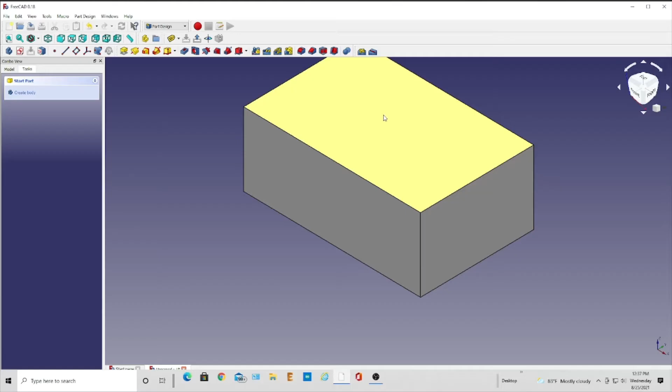While I have this here, I want to get my thickness. So I'm going to click on the very top of this, and I'm going to go thickness, and enter it in. I want those walls to be 3 millimeters thick. And the mode skin is fine.

Where it says arc, you want to put this at intersection. Click this, make thickness inward. We're going to click OK. And there we have our box.

But we're going to want to put something, we're going to make a pocket in here, and we're going to put a corner. We can't just put these holes in here, it'd be too close. So what we need is some fillets in here, or chamfers.

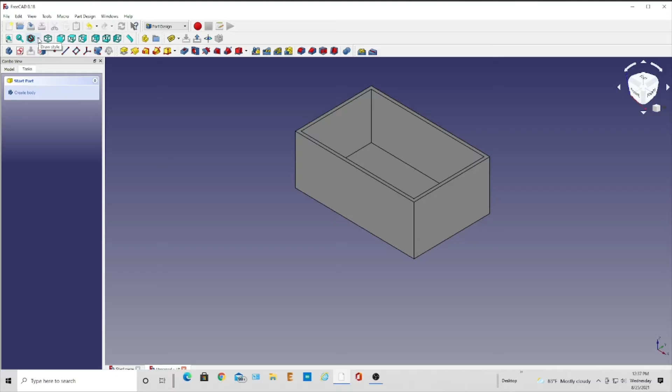So let's do this. Let's go to the draw style and make this a wireframe. From there, I can see these inside corners.

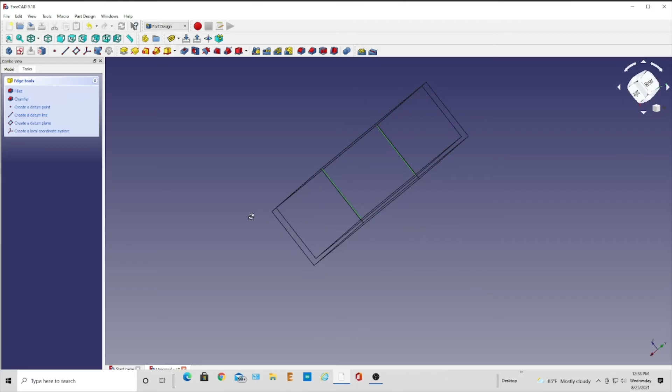I'm going to hit my control button, click that corner, and now to rotate this, I want you to push your middle scroll button and your right mouse button at the same time, and you'll be able to scroll that. So again, that's your center mouse button, the scroll wheel, and the right mouse button.

Hit control again, click on that, hold control, click on that. Then I could come and hit my isometric view.

And I'm going to go to my chamfer, and I want to make that 6 millimeters. That's going to give me plenty of meat in there. We're going to hit OK.

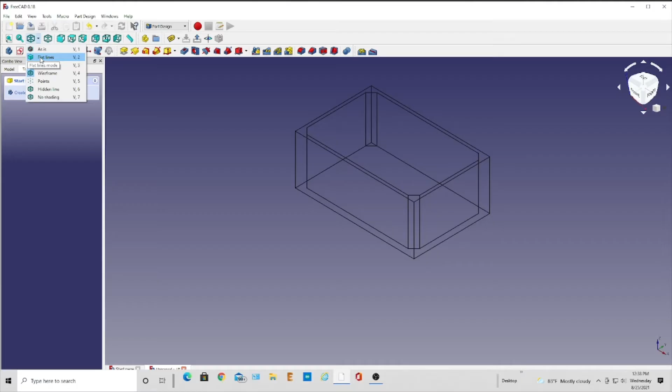And now I want to turn that back on so I can see that. Let's go to flat lines. There's our flat lines. So we're good.

So now I want to work on this surface here to put these holes in it. So I'm going to click on that, and I'm going to go create sketch again.

And now this part's really important. You want to make sure you do this. You want to come over. This is that explode button. It is creating an edge to link for the external geometry. So click that and make sure you hit the outside lines of this right here.

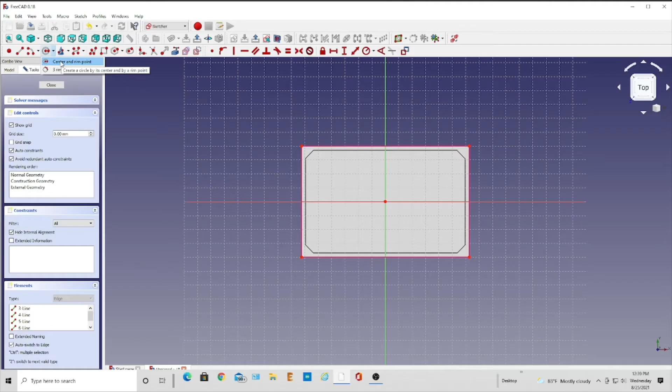Right click on that. Now I'm going to hit my circle button, and I want center and rim point. And let's zoom that in. I just did that by hitting the scroll wheel to zoom that out.

And just get these anywhere located in there. And in here, right click. So we need to get our constraints.

So we're going to make this circle here and this circle here equal. So come up to this equal, and it creates an equality constraint. Now I want this one and this one. I'll constrain that, this one, and this one.

So what that does, when I want to set my size, I can just come up here to constrain the diameter or constrain the radius, hit one of them, and I'm going to say I want this at, say 3 millimeters. We're going to change that later when we do the threaded hole, but we'll just put 3 millimeters in there.

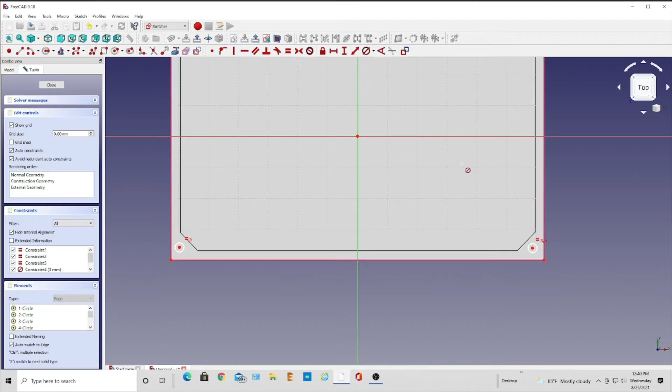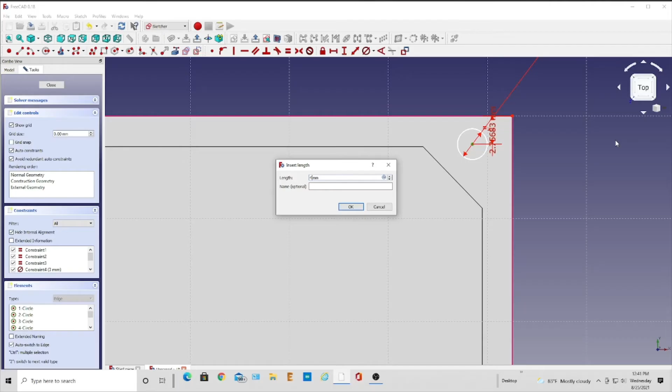So now what I need, and we'll right click off that. I want to zoom in here, and I'm going to give it a horizontal and vertical constraint. So let's do the vertical. Hit that center point and that center point. And let's put this at 4 millimeters down, and we'll have it at 4 millimeters in as well.

And just pan up, and in order to pan, push that scroll wheel on your mouse. Hit that and that, 4 millimeters. Pan over, that and that, 4 millimeters again. And again, 4 millimeters.

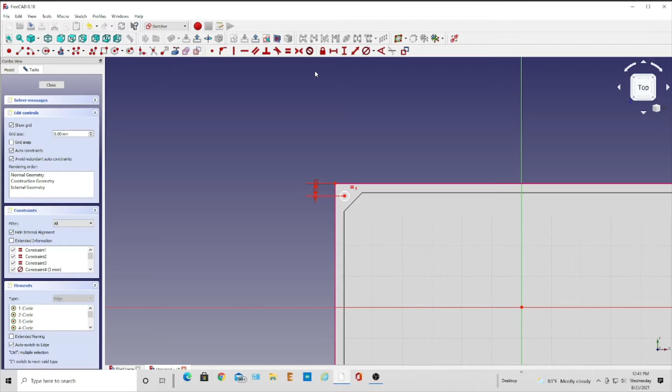Now let's do horizontally. Same thing.

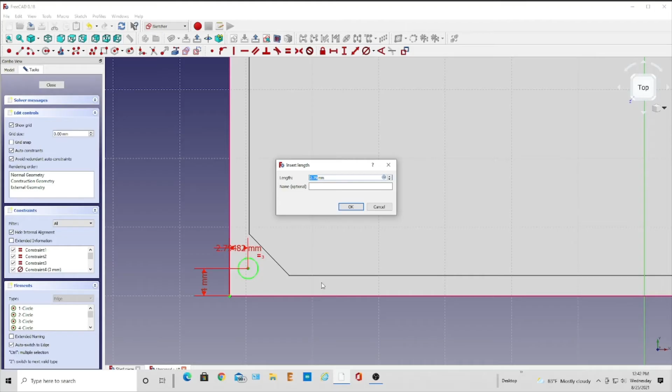And one more time, and when you see this, it's going to turn green. That's because it's constrained. You need to have that turn green on any project you're working on, or any function.

That way you know all the features are constrained. We're going to get out of this again. Click this up arrow here. And now we want to, since we're going to 3D print this, let's go to this hole function.

And the depth - let's make sure you move that over, and I clicked on that, and left clicked until I got that value in there. Let's make that 15 millimeters deep. And the hole cut type, we'll just leave that a straight thread for now. That's all we're going to do. So it should look just like this right here, and we're going to click OK.

Now when that prints, that'll print a threaded piece in there.

All right, so now what we want to do is create a pocket, because we're going to drop that lid in there. So we need to go back in here and click until you get this all highlighted. There we go, and we're going to create a sketch again. Again we're going to have to come and explode that, then highlight that.

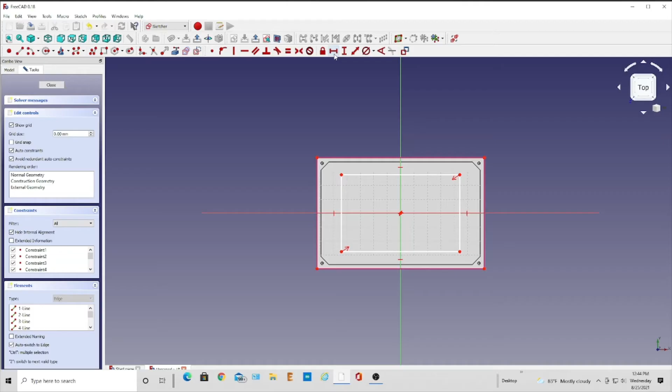Now because this is going to be 3D printed, you don't want to make something size on size. So I want this to have a little gap in here. So instead of making it a millimeter thick, I'm going to actually make it 0.9. So I'm going to come and constrain this and make that 0.9 millimeters.

And then I'm going to do that vertically and make that 0.9 millimeters. And you can see that it's green, so now I'll be able to create a pocket.

So I'm going to close that, and I'm going to come to pocket. And you can see that already put that value in there. So how thick do I want that lid? I think 4 millimeters is going to be thick enough on that. So let's go 4 millimeters.

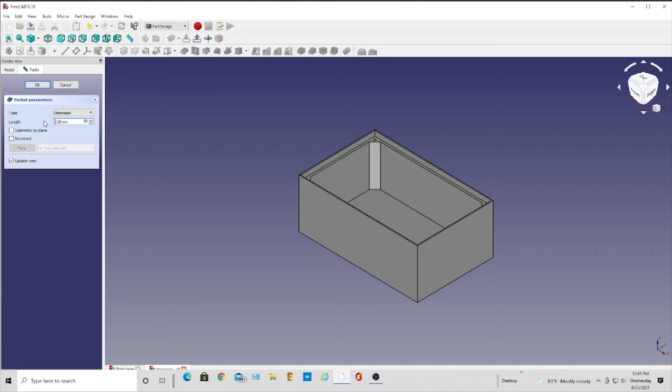And that part is ready to go. Now I can put some radiuses on here, just like I did the fillets. Let's show you how to do that really quick. Let's go to this, and let's go back to the wireframe. And I can click like on this outside.

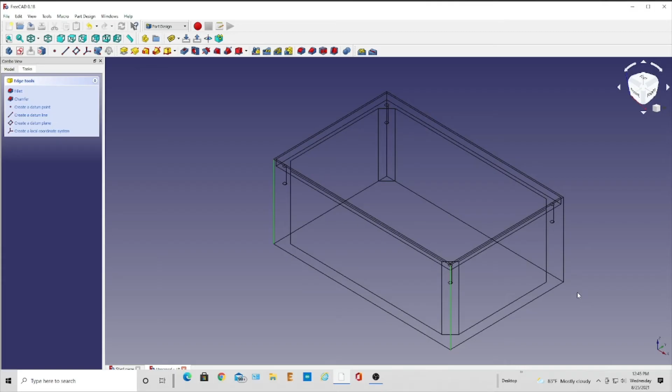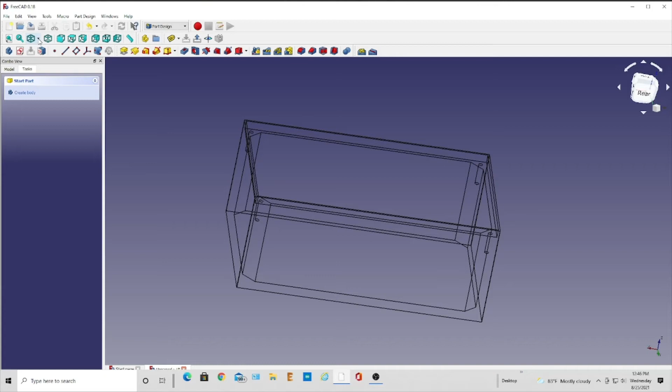And again, the center scroll wheel and the right mouse, and hold that control. And then let's go with a fillet. Let's just go and make that, oh, maybe 0.15 - just a little break on there so it's not razor sharp. And then I'm going to go here and hit flat lines and hit my isometric view. And so we're good, we're good to go.

So let's save that. We're going to go File and then Save As, and we're going to give this a name. We're going to call it Box 25 - just an arbitrary number. And we'll save that in our FreeCAD.

Oop, it wanted me to close that. Before I can save it, I have to close that one more time. So now I can come in here and save that.

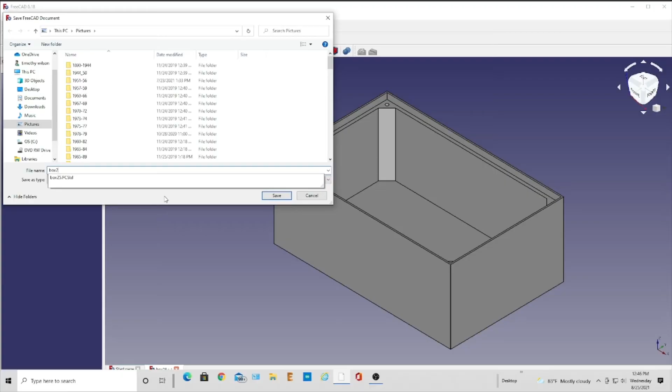Okay, so now we can close that out, and we're going to start a new one. We're going to make that lid. So we're going to create new, and again hit our sketch button and our XY plane.

Click OK, and we'll do a rectangle. Right click to shut that down. Click that one, this one, and the center. Hit this symmetric again. So now I want this to be able to fit into that pocket.

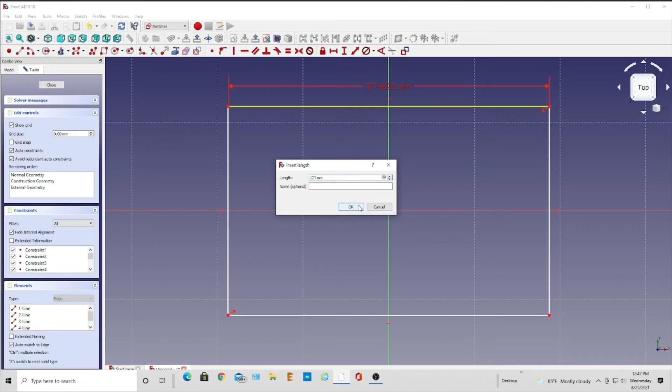So I want 0.9 - I'm going to make this a millimeter shorter on each side. So if I had it at 125 millimeters long, I want it to be 123 millimeters so it's going to fit. So let's give that a horizontal dimension, and we're going to go 123 millimeters. And we'll scroll down to shrink that.

And we're going to hit that one, and we're going to give it a vertical value. If that was 80 millimeters, we want a millimeter on each side, so that's going to be 78 millimeters. Click OK. Now we are fully constrained, and we're going to close that.

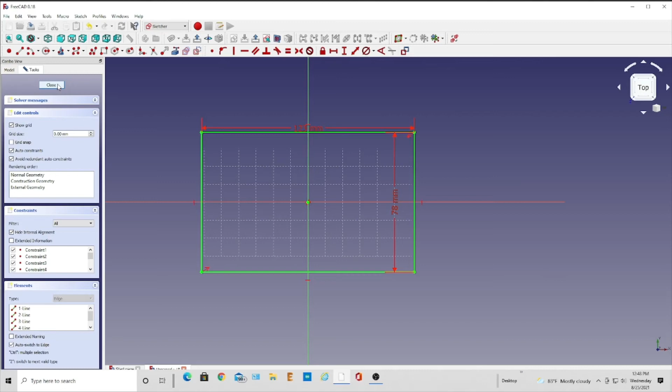Click on Fit All and the Isometric View. Now we want this pad to be 4 millimeters thick. That's how deep our pocket is.

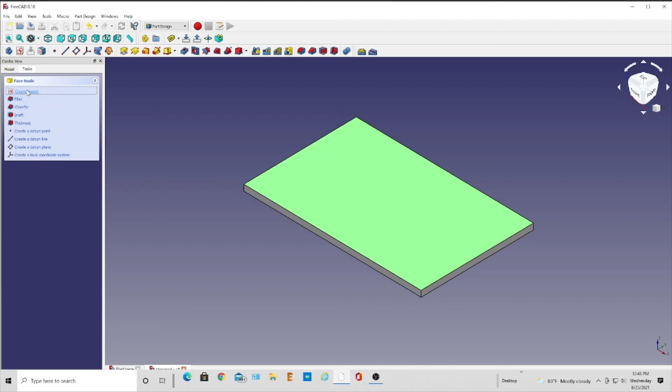Now I'm going to click on this and create a sketch. From here, I'm going to do the same thing I did with the other one. I'll explode that view, which gives me these edges as a reference point. So now I want to do the same thing, put a hole here, centered on the rim point.

Right click to escape. Let's do our vertical one. Now if we're coming in and we know there's a millimeter off of each side that we want, instead of being 4 millimeters, this needs to be at 3 millimeters. We're going to click that center, get that highlighted, and make that 3 millimeters. And this one 3 millimeters as well.

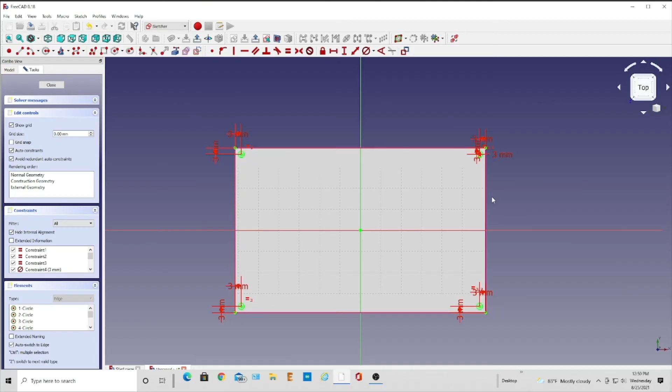And again, right click. Let's do the vertical. All right, they are highlighted green, which means we're ready to go. We'll close out of that.

Now what we want to do is get these countersinks in here, so we're going to go back up to the hole feature. For the profile, we're going to go with a metric coarse thread, and leave the threaded off of there. What size is it? We decided we were going with 2.5 millimeter screw size, so we could either do a counterbore or countersink. We're going to do a countersink in here, and there you go - you can see that'll end up being just right for us.

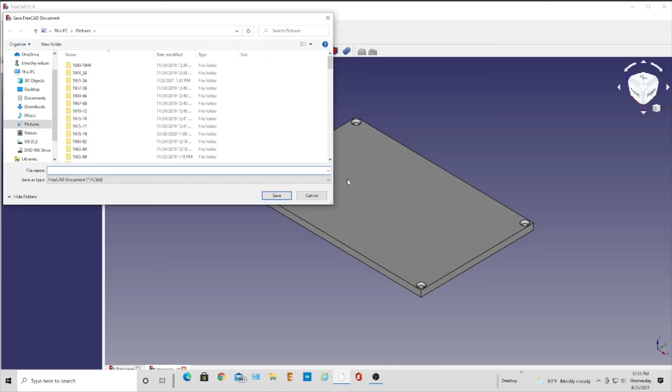We'll click OK. Now that lid is ready to be printed, so we'll close out of that. Leave the object. Now we got to give this a name - file, save as, and we're just going to go lid 25. And we close out of that.

And now I can see if it's going to fit - this is something you can do with that. You can create a new file here. And if you don't have this loaded, you'll have to populate your bar with this. A2 Plus is an assembly, so I just put it in assembly mode and created a new file.

Now what I want to do is go save as, and I'm going to say project box 25, and then assembly. So I'm going to bring in those, add a part from an external file. We'll do that, and I want box 25 - I see that down there, and we'll open that.

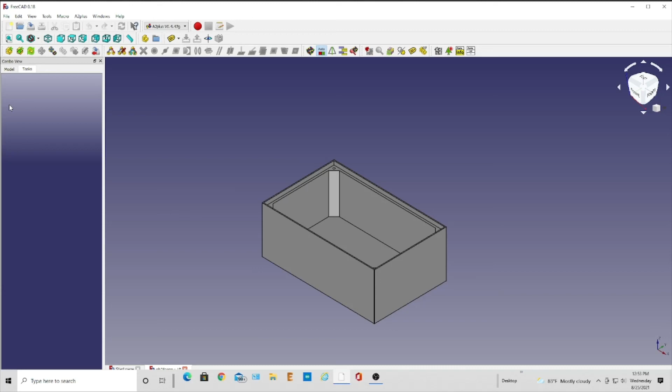And now I want to bring in my lid. This is just, you don't have to do this - this is just to double check it for fit. 25. And I'll place that up there. So what I want to do, I'll click on this feature here.

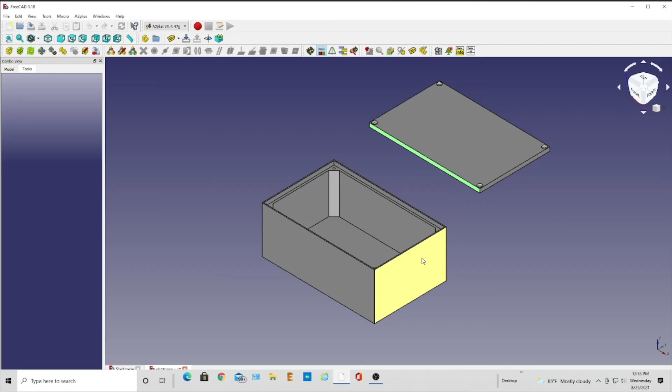Center mouse or center scroll and right click on that. Hit Control, click on that again. Here are my planes, and so I want to create a coincident plane constraint right on this one right here. And I'm going to want to offset that by 0.15, because that's the difference I made in that.

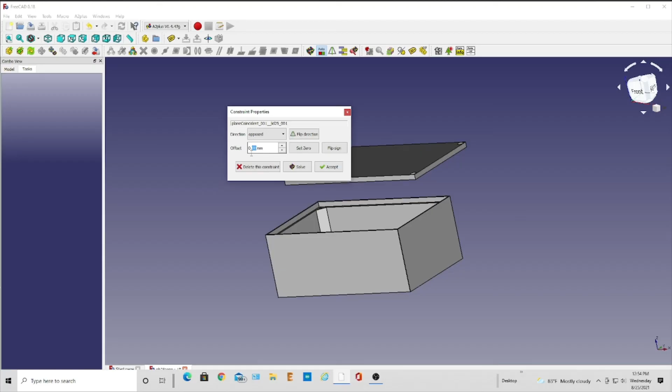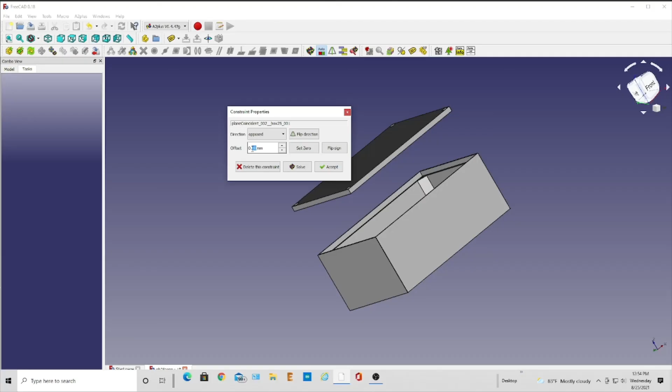Move that over, and now I want this - that scroll button and right at the same time. Control, hold that, go to this plane, and I want this 0.15. Okay, now I'm going to pick this bottom and hit Control.

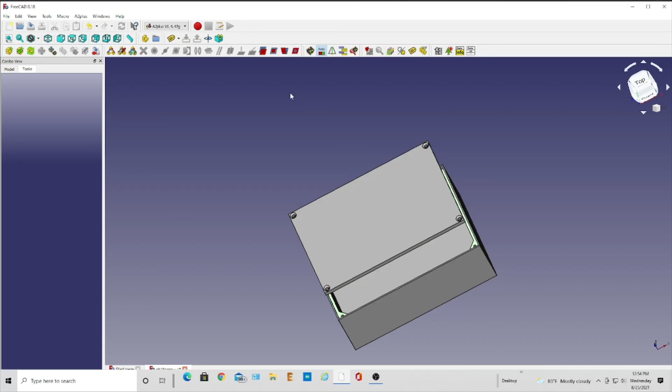And with that center wheel, scroll wheel and the right mouse, that's how I'm rotating that. Now I'll hit Control again, and I'm going to pick this, and I want that to be coincident on that. So I click on that, and there you go. We'll accept that. And I look at that, and that matches up just fine.

So that's it - it's kind of a quick tutorial, nothing really fancy, but it gives you an introduction and you can see the power of FreeCAD. There's just a lot more features on that, and hopefully I'll be able to make some more advanced videos for you here.